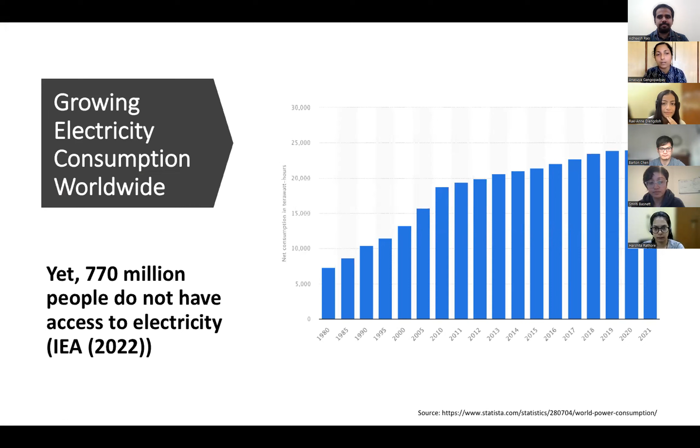Nowadays electricity has become an integral part of our life, and its consumption is growing worldwide. Yet 770 million people do not have access to electricity, so consumption will grow when these people get access. We have the Sustainable Development Goals, defined by the United Nations to attain peace and prosperity for people and planet. Some SDGs are closely related to energy, the first being SDG 7, affordable and clean energy.

Other SDGs are also closely related to energy and intertwined with SDG 7. One is health, SDG 3.9, which is connected to air pollution and health. Then comes tackling climate change.

Why are we talking about the electricity sector today? Because the energy sector alone accounts for 2/3 of global carbon dioxide emissions, and over 40% of this energy-related carbon dioxide emission comes from fossil fuel burning. This is a major issue we need to address. The benefits are that you can mitigate climate change, reach net zero, and attain the sustainable development goals.

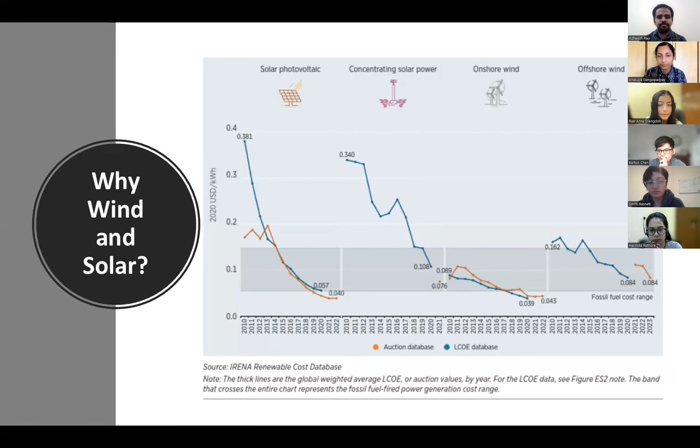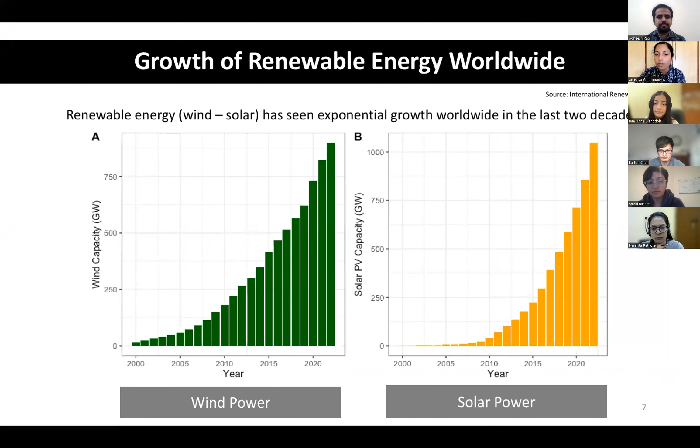This is an IRENA report on the cost reduction of these different sources. As you see, there is an exponential decrease in the price of both solar and wind in the last decade, starting from 2010. This has enabled growth of wind and solar worldwide, and both have seen exponential increase in their capacity from 2000 to 2020. The green shows wind and the yellow shows solar PV capacity worldwide, how they have grown.

India is also not behind. India has its goal of net zero emission by 2070. Now we all talk about net zero. What is net zero? To go to net zero means that you have to reduce greenhouse gas emissions to such an extent that whatever ongoing emissions are there can be balanced by removal. How does this removal happen? Mainly by sea, ocean, and the forest. That means we necessarily have to reduce carbon dioxide emission to a very large extent.

There are several points which can help us reduce that. The first and foremost one, which comes as an NDC, Nationally Determined Contribution of India, is 500 gigawatt of renewables by 2030. That means wind and solar are going to grow heavily in India. Where do we stand right now? Here we can see the status of India. India has also seen exponential growth similar to the world in both wind and solar, and we are the 4th largest in wind installation and 4th largest in solar installation today.

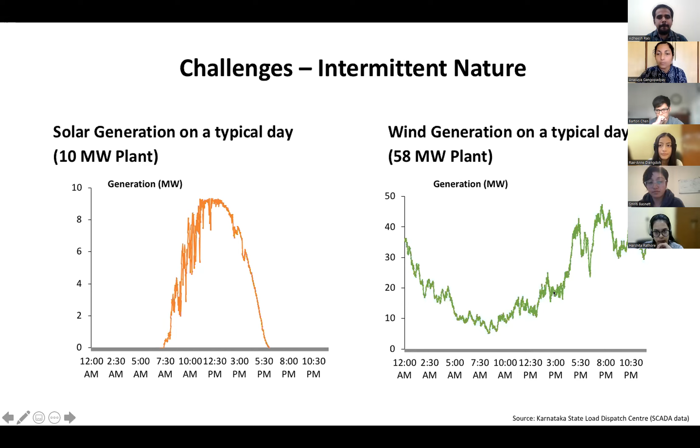Coming to day-to-day variations, here you can see two plots from a typical day in a solar plant and in a wind plant in Karnataka. These are minute-wise variations, the small variations. This is minute-wise data, so you can see how variable it is on a minute-wise basis. And then, of course, you have these daily cycles. This shows the real variability here. Moving on to the next challenge.

The next challenge is low probability, high impact events. What are they? These are events which are very rare to occur, but when they occur, they have very high impact on the entire renewable rich grid. We'll discuss more on this later. And then we have the accuracy problems of solar prediction and wind prediction. These three things mainly make renewables not dispatchable, very unlike conventional generation where you have control over the generation in coal, hydro and all these places.

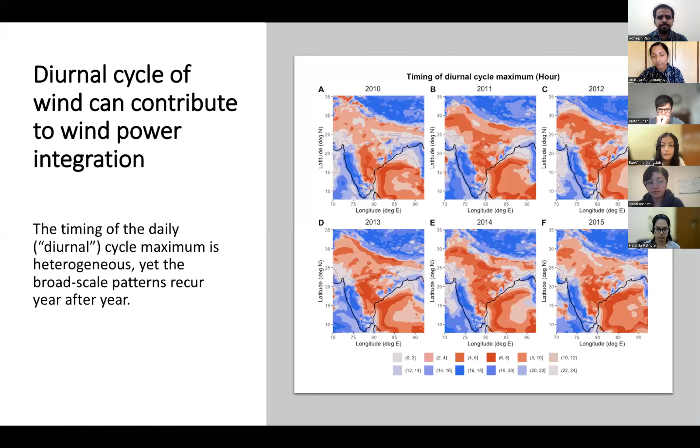And we have checked year-on-year data. It remains the same. So that's why we can explore this to plan our new wind plants in such a way that one of them is in the red area and the other one is in the blue area. And when you integrate these two, you get benefit. So this is the first part of the work.

This brings us to the second part where we talk about energy drought. So we have all seen and known what is drought. That means there is no rain. But what is energy drought? When there is no generation from renewables, because these are also weather-dependent sources, right?

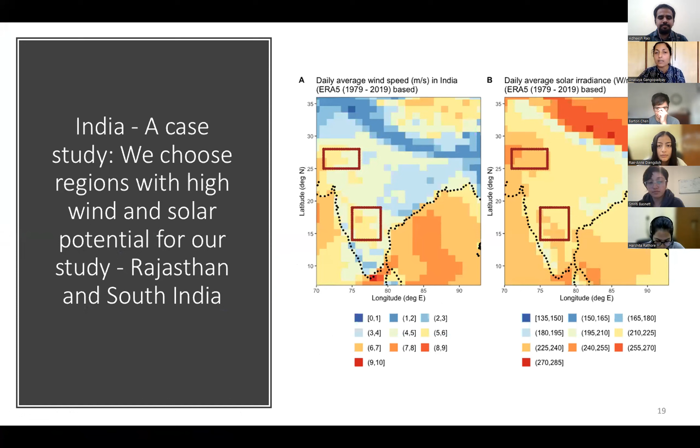So for this, we chose two regions. The first work was based on national scale. This one is based on regional scale, where we focus on Rajasthan and South India, these two boxes here, where the wind as well as solar potential is very high in India.

We found another opportunity also where you can hybridize wind and solar in southern India, and you can avoid these droughts to a large extent, because wind droughts are more severe compared to solar, and when you combine these two, you get a good benefit.

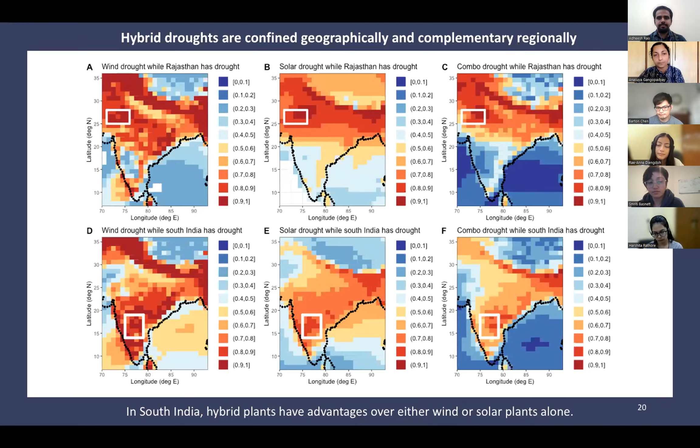This brings us to the last part of the work, where we worked on storage and a combined system which has wind, solar, and storage, and tried to look at the trade-offs. Trade-offs between what? Between the cost and the reliability of the system in a decarbonized grid, where slowly the base load provided by coal is going to reduce, and you have a certain amount of flexibility in it.

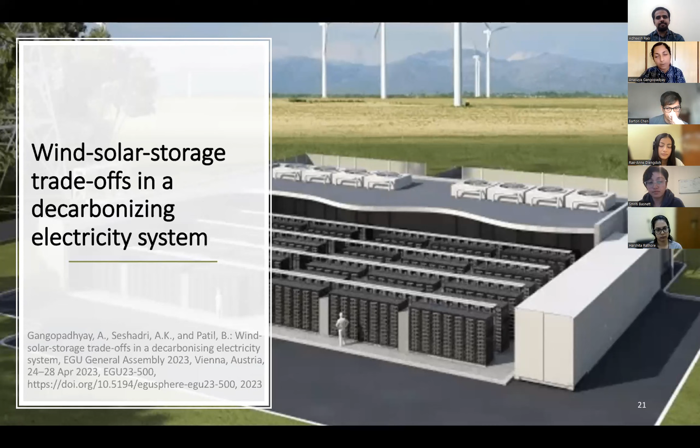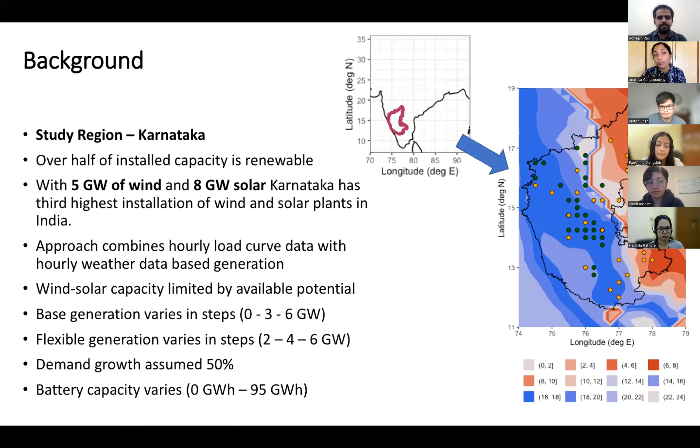The study region here is a state, Karnataka, where we are located. Why Karnataka? Because Karnataka has the third highest installation of wind and solar in India, and it's huge. We keep varying the base generation and flexibility availability, then we project the hourly demand and the hourly weather-based generation, and try to develop a model to balance these two. How do we balance?

This is a sample for 4 different seasons: one with high solar, one with high wind, and the other 2 with low wind and low solar. These are typical 6 consecutive days in each. The point to notice is this gray region, the time when we can't meet the demand using all our generation, in spite of having wind, solar, and storage, all 3.

If a battery is there, this pink shows the battery charging. However, in low solar months, you don't have enough electricity to charge your battery so much, so you end up having certain reliability issues. Coming to high wind, you can meet all the demand during the last 3-4 days, but you end up having a lot of curtailment.

So these are the main challenges here where we have to look at this problem in further detail. And we did simulate a lot of situations like this. And finally, we found out in a completely decarbonized grid with 6 gigawatts of flexible generation, and if we allow a certain amount of curtailment of generation from renewables, curtailment means when the renewable can generate, but you are forcibly stopping it. So that kind of situation is not good from a financial perspective.

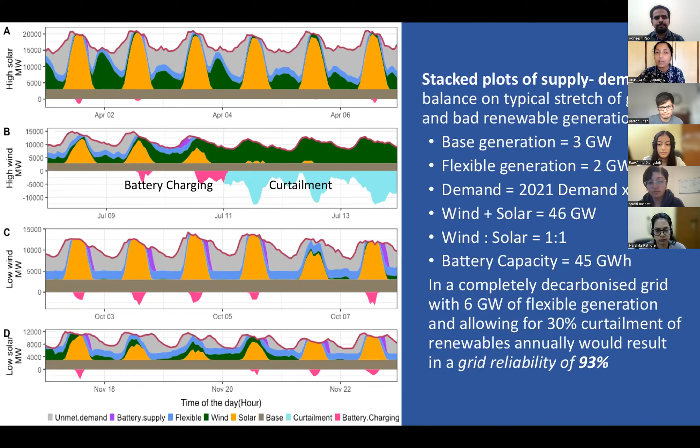But for reliability, if you can allow a certain amount of that event, then finally you will achieve 93% reliability. 100% reliability is very, very difficult to achieve, at least from Karnataka's perspective. Here are the acknowledgements, and here I summarize what I discussed earlier.

The first work was on diurnal smoothing, which says that you have to aggregate generation and strategically install new wind plants so that you get this benefit of diurnal smoothing based on the pattern. The second one is about selective hybridization to avoid extreme low generation events. And the third one was about wind-solar storage trade-offs in a decarbonizing electricity system.

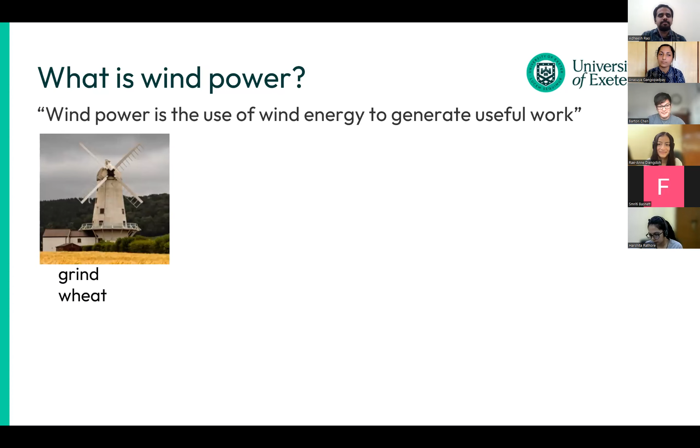So the very traditional one is you can use the windmills. In some countries, they use wind power to pump water, or even sailing boats use wind power. So there are many examples of using wind power. But today, the most popular usage is to generate electricity because that is very easy to access compared to fossil fuel. And also, one big wind turbine can produce a lot of energy for thousands of houses. So that is the way people are using wind power.

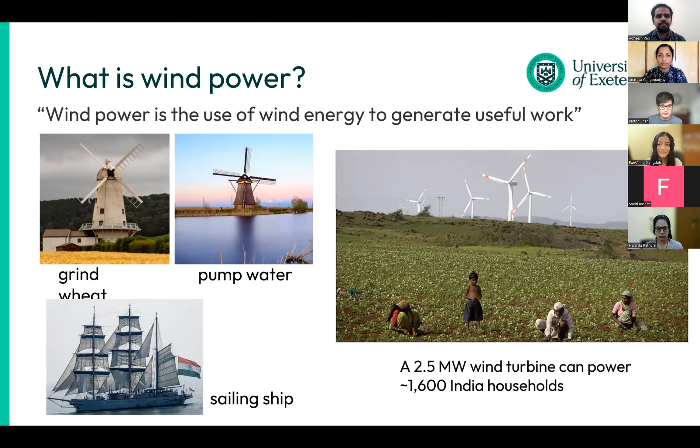So why are we using wind power? There are different things: it's renewable, ideally it never runs out, and it's easy to get because wind is pretty much everywhere in the world. And one of the key things people really like is you don't emit any greenhouse emissions during operation time.

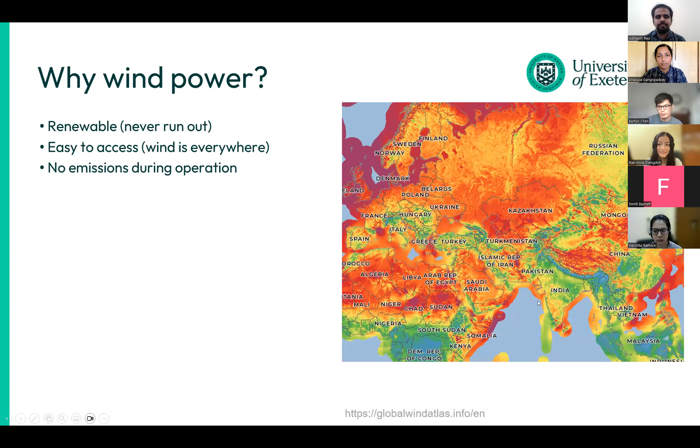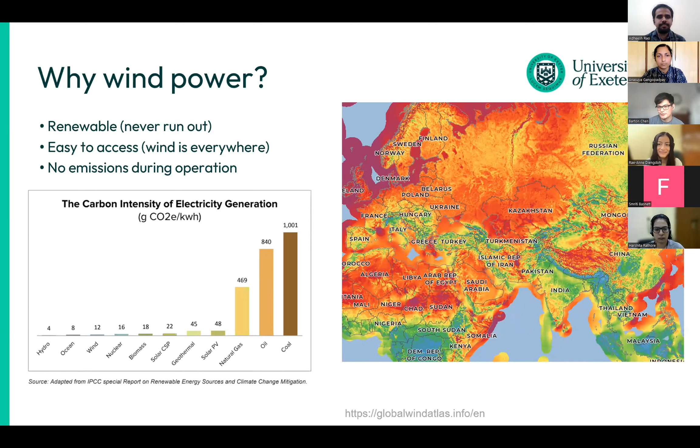And another key thing people really care about is the carbon intensity of the electricity you generate. So this figure is, when you generate 1 kilowatt hour of electricity, how much carbon dioxide emission you would produce in terms of the whole lifetime assessment. So you can see coal or natural gas or oil, they have pretty high, over 400 or 1,000. But for renewable energy like wind and solar, they're pretty low. Here, the figure is below 50. So that is one main reason people really push renewable energy, especially wind, in the energy system.

So how do we extract wind power? Based on the very basic science, wind power you can think about as kinetic energy. So you can use a very simple equation to calculate how much energy can be carried by the wind. The most basic parameter is the density of the fluid, here the air, but ideally you can apply it to water if you're talking about the flow in the sea or in the river. The second key parameter is the swept area that your wind turbine or any turbine can cover. And the last one is the speed of the fluid. So those three are the key parameters that decide how much wind power you can get.

But because the wind turbine has a certain efficiency, there's one key parameter we call the power coefficient. That is actually how much wind power you can convert to electricity. This is a little bit interesting parameter because it depends on many factors. First is the design of your turbine, and the last parameter is the turbine tip speed ratio, that is the ratio between the wind speed and the speed of the tip of the blade.

So you can see there are different designs of wind turbine. Like this one is the vertical one, and this multiple blade one, and this very interesting one with two curves. Those are different wind turbines people are using today. But the most common one you see today for large scale wind turbines is either the 2-blade or 3-blade wind turbine, because it's easier to manufacture at large scale and generates more power. But one interesting thing you can see here is this power coefficient has a limit. The maximum of this coefficient is nearly 0.6.

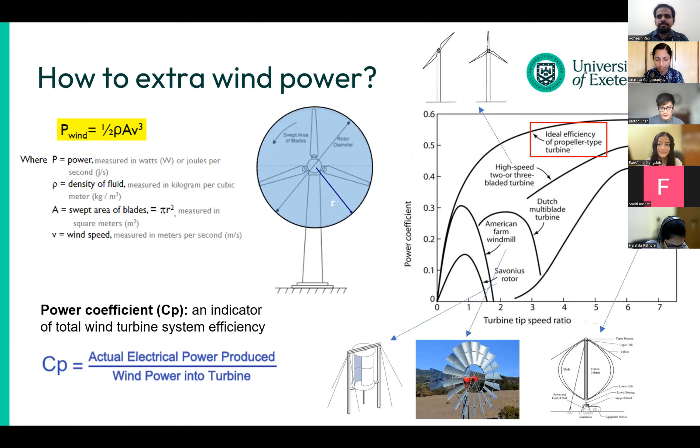Another slide I would like to introduce is the components within the wind turbine. There are a couple of basic components. First you have the rotor with the blades. The typical one is 3-blade today. And you have everything inside the big box behind, we call the nacelle. In the nacelle, the first important thing is the gearbox, which converts the low rotational speed, about 10 to 20 RPM, to thousands of RPM for the generator. Then the generator generates electricity, and the electricity goes through the power cable in the tower.

And there are another two interesting systems. First, there's a control system on the turbine that can monitor the wind direction and the wind speed. And then there is a yaw system to change the angle to face the wind. For example, if the wind is blowing from the east or north, they will change the angle. Otherwise, you will have less power generation.

Another important thing for the wind turbine is what we call the power curve. On the right-hand side, you can see in the power curve of the wind turbine, usually there are 3 important wind speeds. The first one is the cut-in speed. It means if the wind speed is below that number, you can't generate any electricity because it's too low. Once you pass that wind speed, the power generation starts increasing. Once you reach the rated output speed, you produce the maximum electrical power.

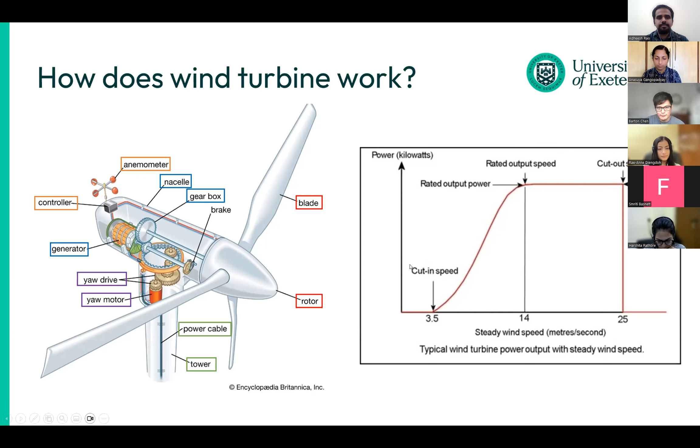And so one tricky thing is how we can keep the same electricity power output. There's a pitch system that can change the angle of the blade, so that can keep the load on the wind turbine the same. So that's a little bit about how the wind turbine works. So I want to introduce this.

There are two typical types of wind power we can see today. One is onshore wind power generation, the other is offshore wind power. And one of the key reasons is the wind power is really affected by the terrain on the ground. So for example, if you are in a city or in a forest, even a few trees will make the wind speed reduce close to the ground level.

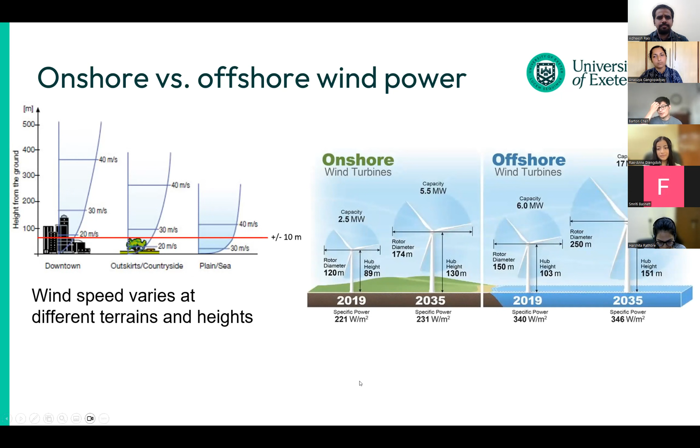So that's why more and more wind turbines are built on the sea, because there are no buildings or other things to slow down the wind. And another thing is when the turbine is higher, the wind speed will be higher. So that's why nowadays turbines are getting bigger and bigger and higher and higher. The typical 2.5 megawatt turbine is about 100 meters high, and in the future it will probably increase to 140 meters high.

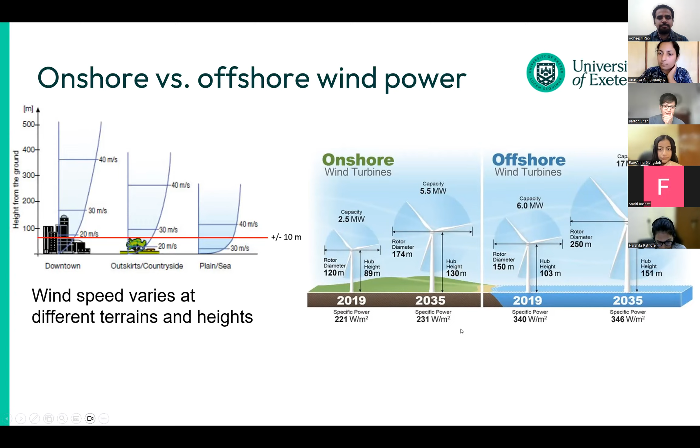But for offshore wind, it can be nearly 150 meters today, and people are even talking about 200 meters. So that is the progress of wind power technology. But besides onshore and size, one of the things people have to think about is how to build those wind farms. One of the biggest limitations for onshore wind turbines is they are pretty big, and the parts need to be transported by road.

But for offshore wind power, it's slightly different, because ideally, if you have a way to access the port on the sea, then you always have more space to build a very, very big thing. So that's why today a lot of offshore wind turbines are much, much bigger than onshore, because it's easier to handle big things. But the challenge is how to install them.

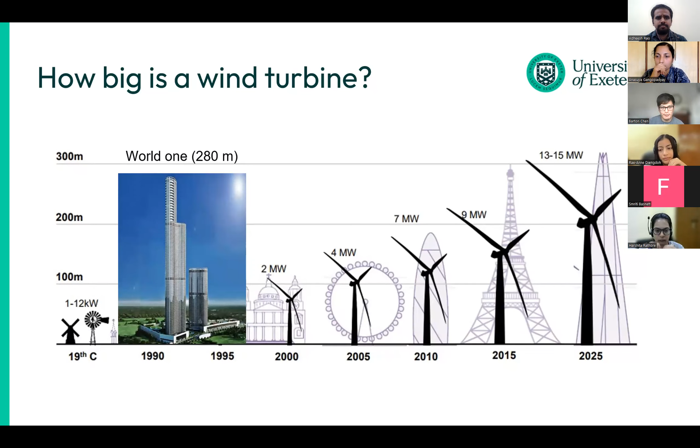Just for reference, this one building in India called World One is nearly 300 meters high. So in the future, some offshore wind turbines could be much bigger than that. That will cause a lot of challenges, like how to get those materials, because they're really big, and how to do installation and how to maintain them. So there will be many technical and engineering challenges.

So now, since the wind turbine is so big, what is the material to make those things? Basically, there are about five different materials. The first one, the body of the tower and the cover of the nacelle, is usually made of steel or iron, because that gives a stronger structure so the turbine can stand in strong wind. And in the generator and the transformer, you have a lot of electrical materials like aluminum and copper, for electrical transmission.

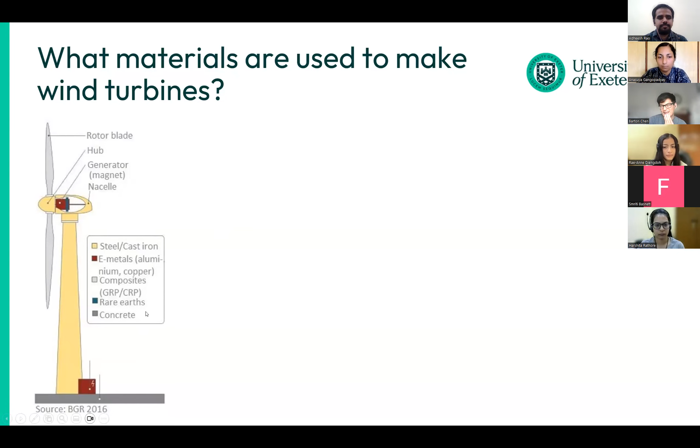And the third one is a very tricky one, the blade, because the blade is very long and needs to be very thin and light. So today the most popular materials they use are composites, different kinds of polymer. And the last two are the rare earth materials for the magnets in the generator, and there's some concrete at the bottom. So that causes some problems.

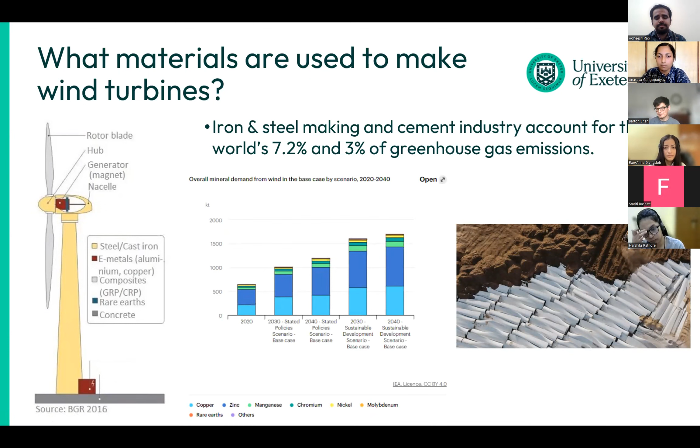And the last thing is another very tricky challenge: the composite blade is very difficult to recycle. So today, what people do once they decommission the blade is just bury it under the ground. That is totally not sustainable.

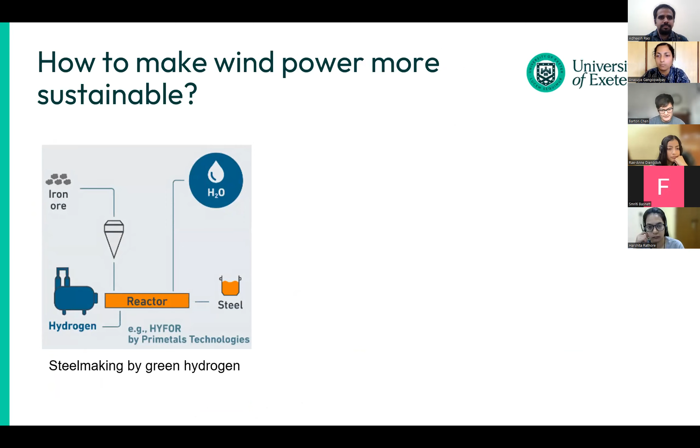So if we want to use wind turbines to decarbonize our energy system and make it more sustainable, how can we do it? There are different technologies. For example, they already have steel making processes powered by green hydrogen. So instead of using coal, they use hydrogen in the reactor. So that is one of the innovations people are working on now.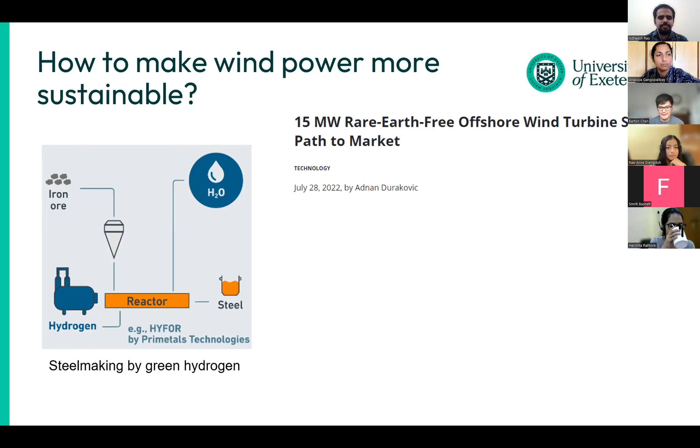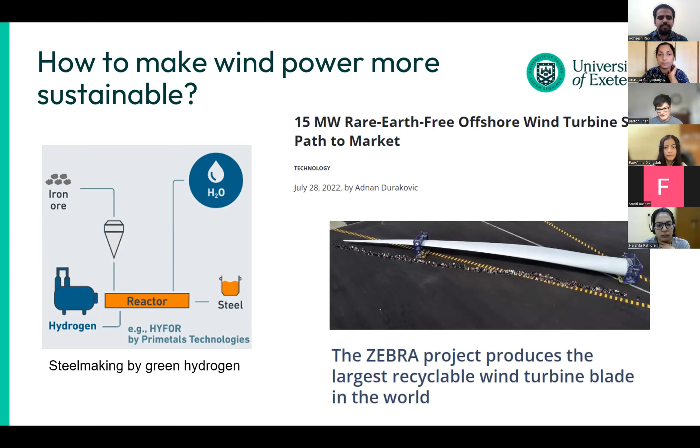And another one is the rare earth material free wind turbine, which means they have an innovative generation system in the turbine. That can be another option. And the last one is people are working on recyclable wind turbine blade material. So that can reduce the environmental impact of wind power.

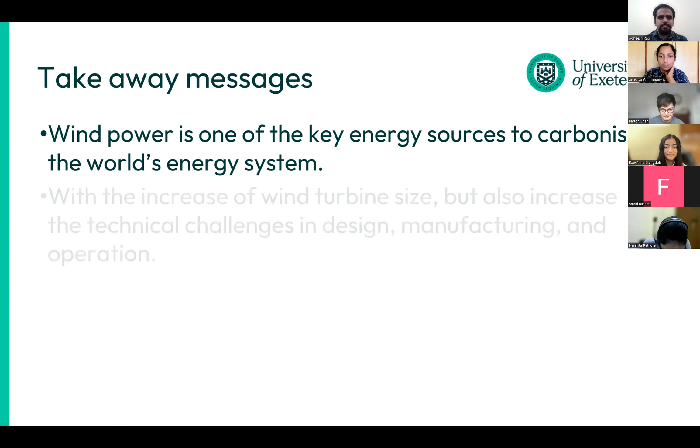So here's my last slide. Today I talked about many things, but the key thing I want you to know is, first, wind power will be one of the key energy sources in the future. So you will probably see more and more in the next 10, 20, 30 years. But as you can see, the size of turbines is increasing, so there will be many technical challenges.

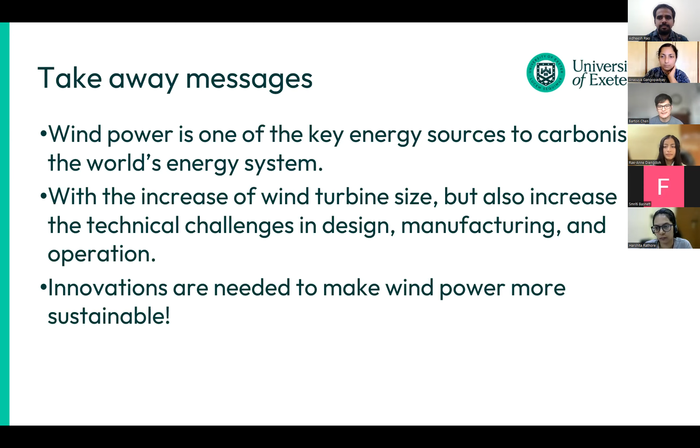Like how you design something that big, how you manufacture those big things, and how you maintain and operate them. Those will need a lot of engineers and scientists to solve. And another one is that innovation is really important, because we are using wind turbines now, but a lot of things still need to be improved, especially to make the life cycle of the turbine sustainable. So that is my talk today. Thank you.

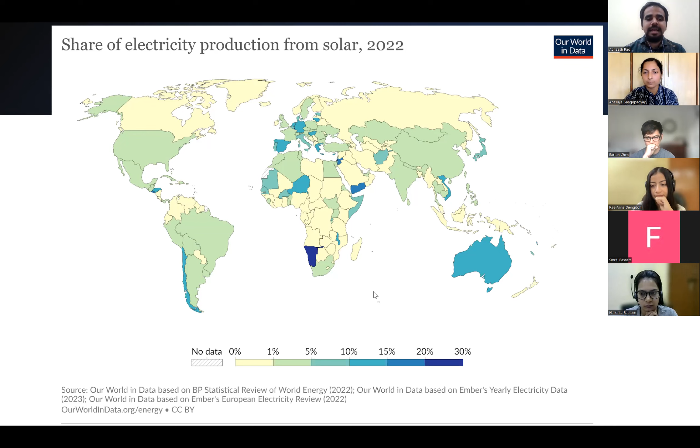And in India, we have just 5%. And across Asia, it's almost the same. And it's the same across the Americas as well. But there are certain countries which do make much more use of solar energy because they don't have other energy sources like solar, which is easy to use.

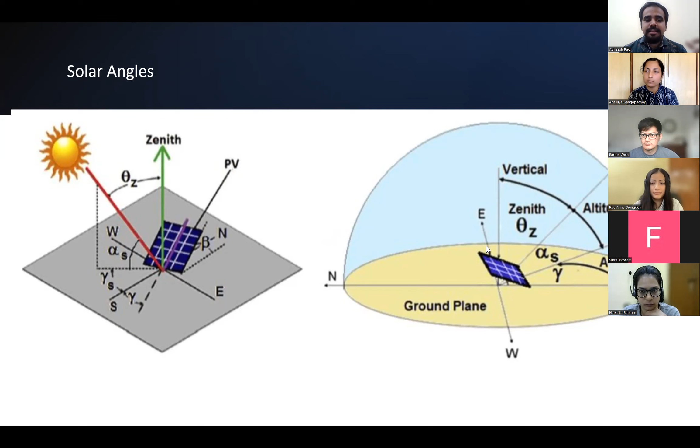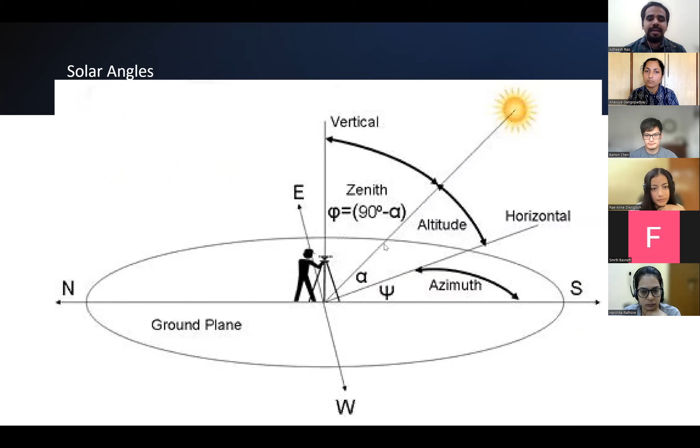Next, we shall cover the various types of angles. Why is it important to know this? If you are asked how much energy from the sun is falling on top of a solar panel and how much of it is used, these are the angles that we need to consider. So for example, we have the zenith angle, which is 90 minus alpha, the azimuth, which can be seen through the horizontal distance from the south or any other axis. These angles are what help us determine how much energy is generated through solar.

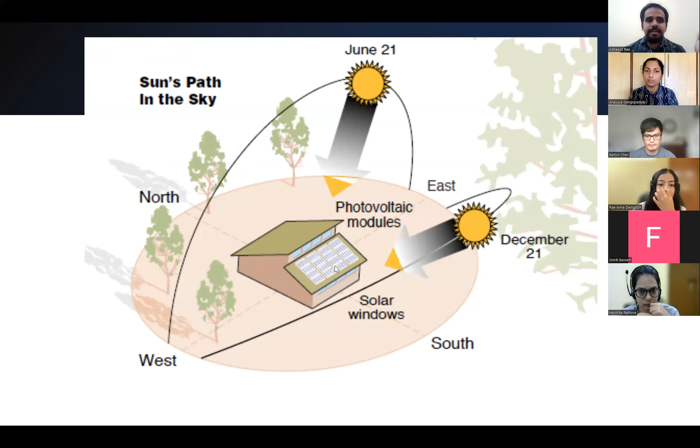So here you can see the solar panels on top of a house, and the movement of the sun from the east to the west, and the pattern of how the sun covers its daily cycle of moving from the east to the west. This is the sun path. And next, I shall come to the actual operation of the solar cell.

So before that, let me tell you that a metal does not have different layers. Even though it has layers, the layers are very close to each other. And that is the reason why the electrons are able to move very freely, and there is no energy gap in between, in the sense that when the metal is excited through any medium, the electrons are able to move very freely, and that is why they conduct electricity much more easily.

Whereas insulators have a band gap. So what happens is that even if you put electricity into it, because there is a difference in the surfaces within the material, the energy is not conducted, in the sense that there is a band gap of over 3 electron volts in between. So even if you apply some energy, the band gap is not crossed, and the electrons are not able to move. That's why they become an insulator.

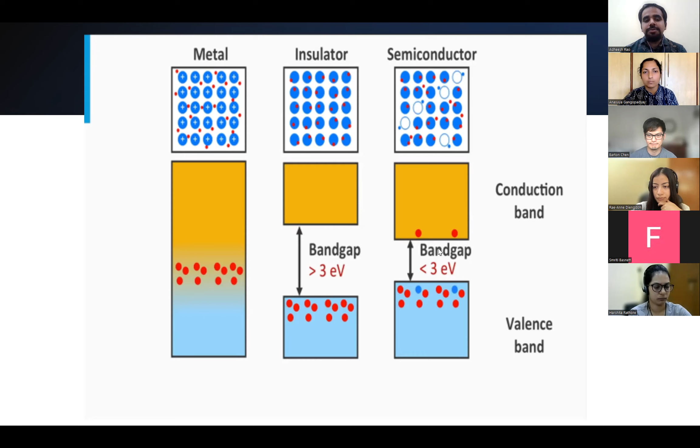And the semiconductor is basically a material which has a shorter band gap, and the electrons are able to jump across the band gap, go to the conduction band and conduct electricity. And that's why semiconductors are used for solar cells.

So now let me get to the chemistry aspect of it. So here we have a hydrogen atom, and you can see at the center of the atom you have the proton, and in its orbit you have an electron. So there are different levels of orbits around an atom, and these orbits determine how far away the electron is from the center.

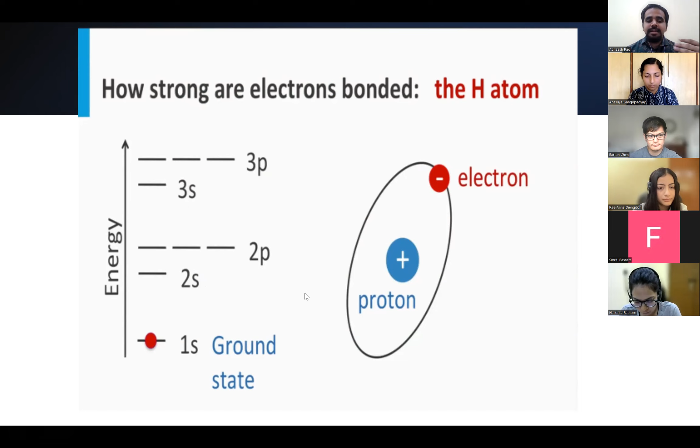So we have 1s, 2s, 2p, 3s, 3p. They are the different orbit levels around the center of the atom that the electrons occupy. Here, the hydrogen atom has only 1 electron, so it's in the lowest state, which is the closest to the atom center. So that's why it is quite stable, and it does not react with other elements. Whereas we have helium, which has the first orbital occupied with 2 electrons. So 1s, which is the closest orbit, has 2 electrons.

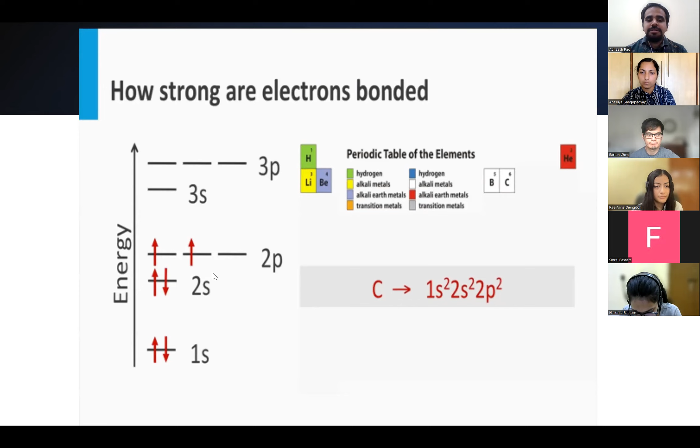And next we have carbon, which has 6 electrons. And the distribution is such that it goes to 2s and 2p. So they are orbit layers around the atom. So as you can see, at 2p you have 2 electrons which are further away, and they can react with other elements. So that's why carbon can basically fuse with other elements, because of the electrons at the outermost orbit, which is 4 electrons. So these 4 electrons in 2s and 2p can react with other elements.

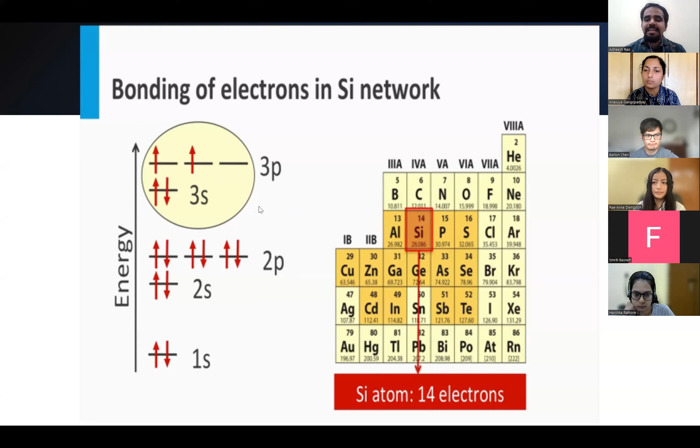Next, I'll be talking about silicon. Silicon, which is used as a semiconductor, has 14 electrons. And out of these, the 4 at 3s and 3p, which can be seen in the diagram, are able to react with other elements. They basically need at least 8 electrons to become stable, so that they don't react to the outside world. And since silicon does not have a stable configuration, it has 4 electrons that can react with other elements. And that is why silicon is chosen as a semiconductor to generate electricity, because it is able to give away electrons very easily, and it can react with other elements.

And you can see that the periodic table basically tells you how many electrons are present in the outermost orbit. So the placement of each element explains how many electrons are present in the outermost orbit of the atom. So basically carbon has 4 electrons, silicon has 4, and germanium has 4. So they become group 4 semiconductors. And since they have 4 electrons, they can combine with another element which has 4 electrons. And that is why you can see the light blue here is how they react with each other. So silicon and germanium react together.

Whereas 3-5 semiconductors, that means 3 in one and 5 in another, combine together in the outermost orbit and become a proper semiconductor. And then you have 2-6. So 2 and 6 together becomes 8. So you have cadmium telluride, which is shown here. So it forms a stable configuration when it reacts with other metals. You can see the green which has 2 and the green which has 6. These elements have been marked in 2 different ways to show you how they combine together.

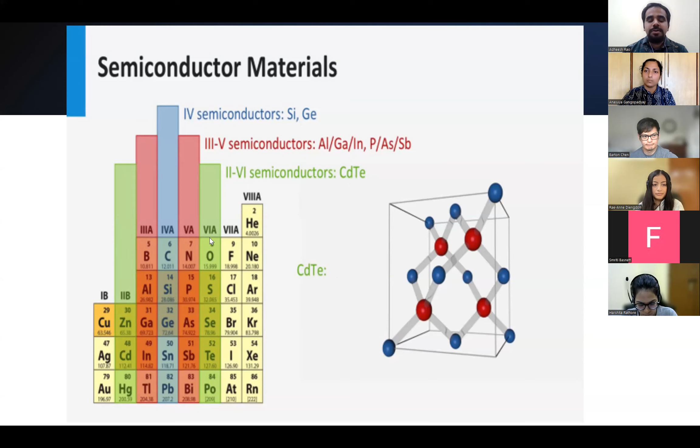So then we have what is a p-type semiconductor and an n-type semiconductor. So silicon is doped, in the sense they put an element on top of silicon. Some, like phosphorus, give you extra electrons; that is called the n-doped element. And some are called p-doped. P-doping is when they put an element on top of the existing element, which creates holes, in the sense that they lack electrons. Even though they are fused with silicon, they will still lack electrons. And because of that, they become p-doped and n-doped semiconductors.

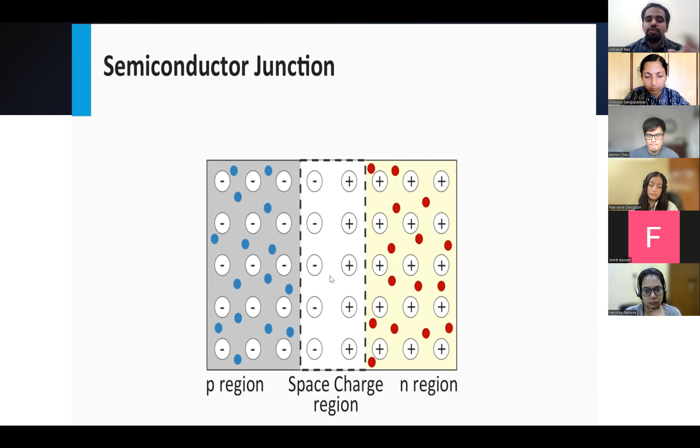So you need to make the electrons cross over so that the electricity is generated. In the p-type and the n-type, they have different energy Fermi levels, and because of which you need to provide some energy for them to get excited enough to be able to cross the band gap.

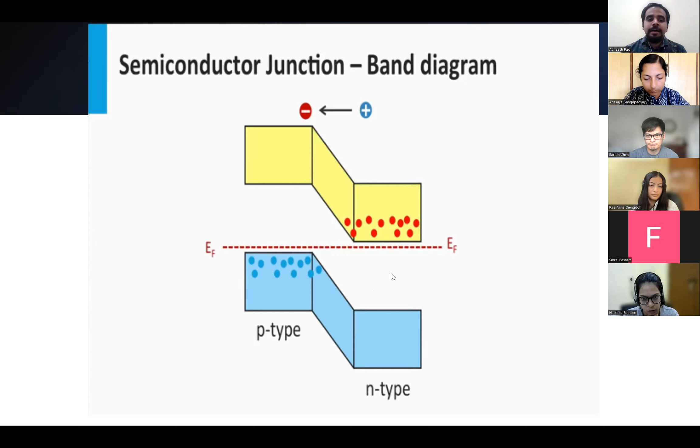So in the p-n junction of solar cells, there are 3 essential steps that are required for the operation of the cell. One is the electron hole pair generation, then the separation of the electron and hole at the junction, where the wires are connected to the semiconductor, and then the collection of electrons and holes at the terminus, wherein the electrons start moving towards the holes.

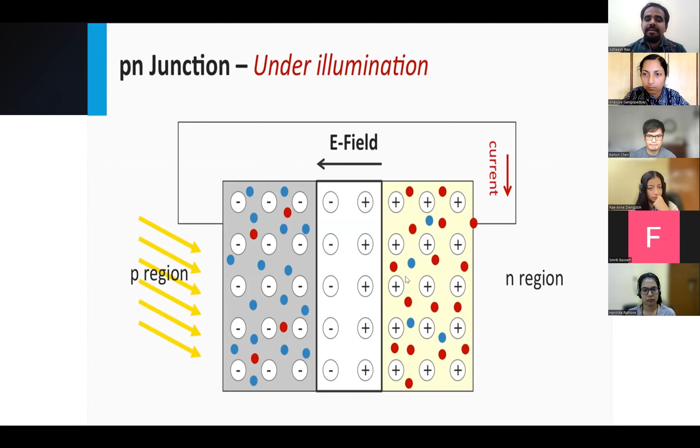So here, as you can see, the light falls on top of the semiconductor. It charges the semiconductor, which makes the electrons get excited enough to go to the next state. And that in turn gives you a current.

And here you can see in a better way how the N-type has the electrons that move to the P-type, and the P-type has holes that move towards the N-type when they are connected together. And they cross over the depletion region because of the electric field generated. And the depletion region is the gap at the junction, wherein they have the positive and the negative charges. And because of which you have electricity generation.

That is, the light falls on top of the semiconductor, the electron gets excited, and they move towards each other through the depletion region, and they give you electricity. And here you have another description of how they move through the solar cells. So each solar cell produces almost 0.5 volts, and a series of solar cells are connected together, and they together give you energy of 150 watts or greater.

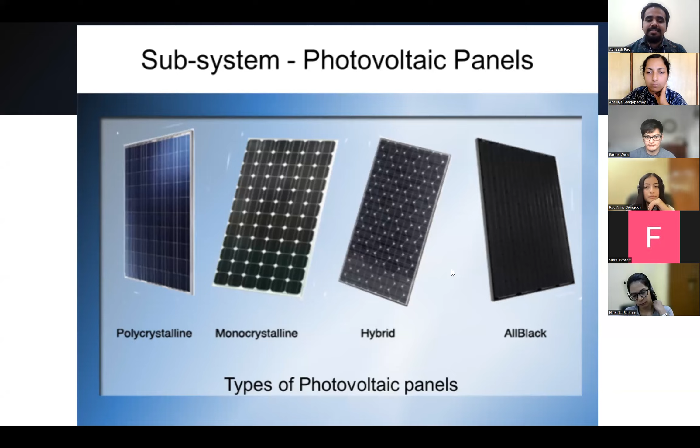And these are the different types of photovoltaic panels that you can see. They are monocrystalline, polycrystalline, hybrid, all black. There are different types of solar cells which generate electricity. And there are certain applications for solar cells as well, which might not be known to people.

For example, in the university where I studied my master's, the university is working on making solar powered cars. With the help of the university, they have already launched a car called the Lightyear 1. You can search for it, Lightyear 1.

And it has a range of almost 720 kilometers. It can give you 400 kilometers if you charge it one night. And it's a very nice car, and you should check it out. It's similar to Tesla, but it is powered by solar cells.

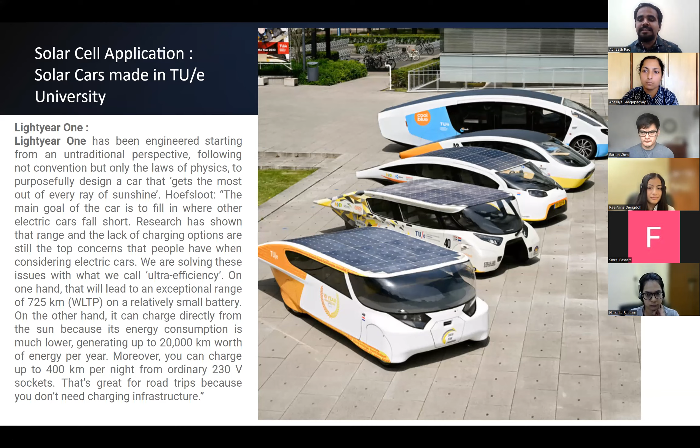And the other major application of solar is definitely the building sector, wherein you have panels integrated on top of the buildings, like the rooftop type, the balcony type, or curtain wall type. So basically, they integrate it into the building so that they help you generate electricity for household needs instead of relying on the grid.

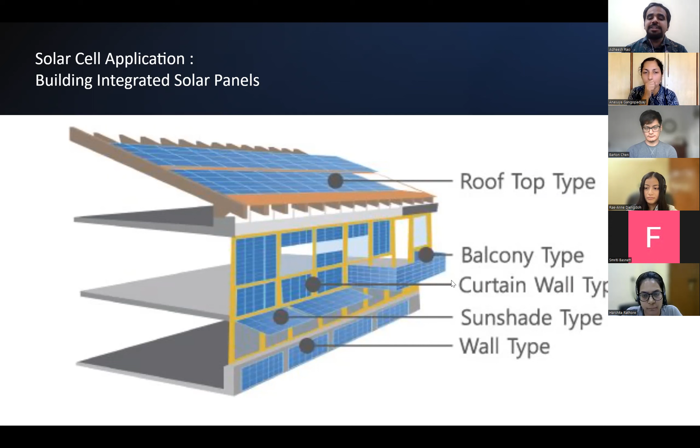And there are many different components of a solar cell system when it is connected to a home or a building. So basically, when you have kept it outside, you have a charge controller, a battery, and then you have an inverter. And after which you get the electrical appliances, which basically use the electricity. So what are these different components? I'll be explaining in a bit more detail.

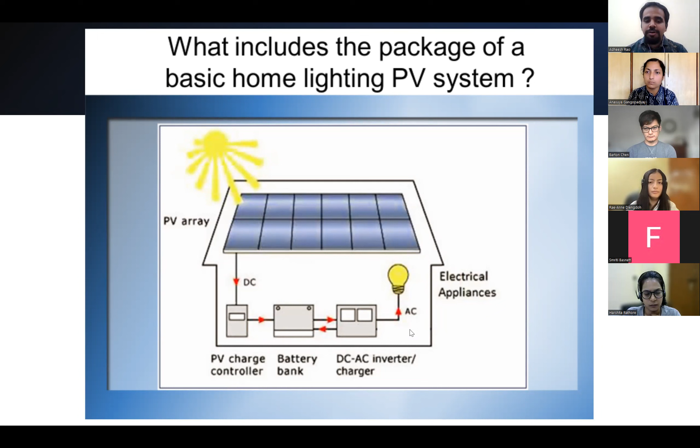And then there is dust collection over the panels when they are not maintained. Then even if there is just a tree next to the solar panel, it might not charge as well.

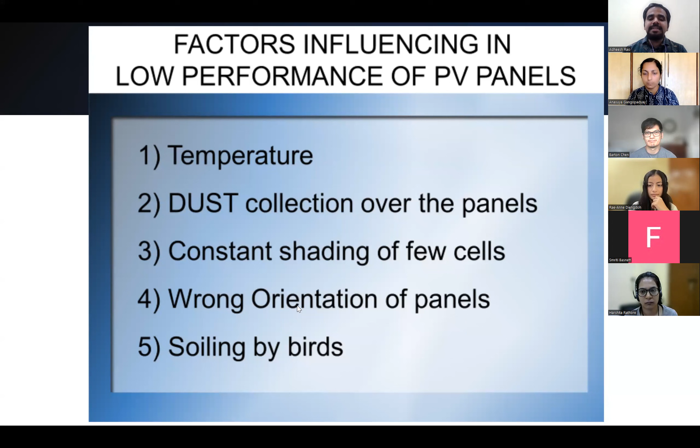And then there is also the problem of having to orient the solar cell towards a particular direction so that it gets direct sunlight. And then also, of course, there's soiling by birds. And next, I'll come to the different components of this system which we are having at home.

So we have to choose a battery. And to choose a battery, we have to look at the amps and the volts, which gives us the watts. And you'll need to know how much energy or loads are operating over the system to choose a battery. So how much energy is going to get generated from the solar cell has to be known before we get a battery for it.

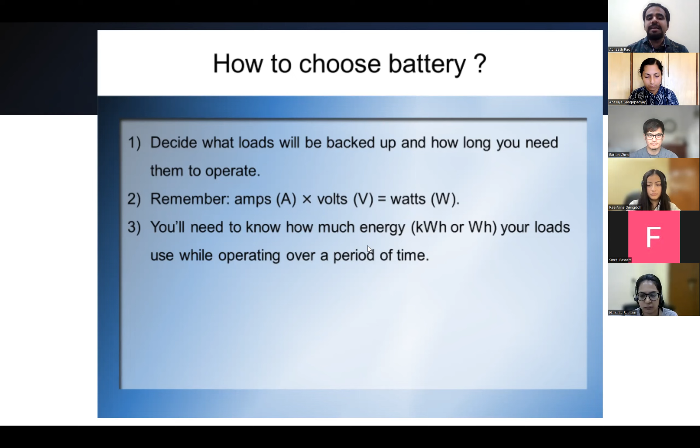And the battery has something known as a depth of discharge, in the sense that you can have 1,500 cycles of energy discharge at 80% depth of discharge. The battery can give you energy up to 80% when there's 1,500 cycles of it which has been used. And there are 3,000 cycles at 50% depth of discharge and 5,000 cycles at 20% depth of discharge. In a sense, the amount of energy reduces, but it can operate longer.

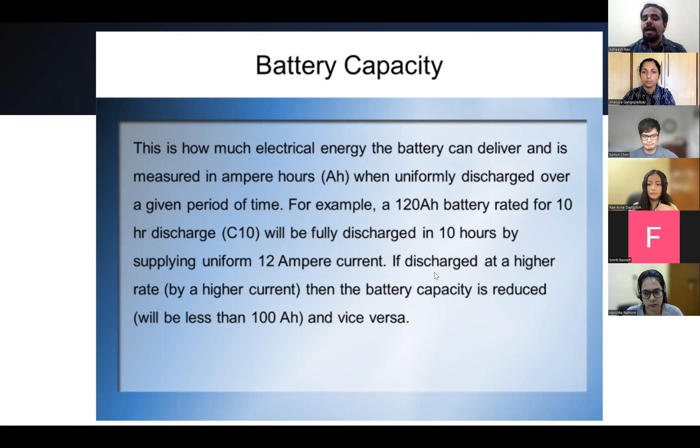And for example, a 120 ampere hour battery rated for 10-hour discharge, C10, will be fully discharged in 10 hours. And it will supply a uniform 12 ampere current. If discharged at a higher rate, then the battery capacity is reduced and it will be less than 100 ampere hour. Okay, so 12 ampere current you get for 10 hours. You can multiply it by 10. So 12 ampere each hour, and it operates for 10 hours. So that becomes a 120 ampere hour battery.

And then we have an inverter. These inverters are basically what help convert the electricity generated at the solar cell into the electricity that can be used at home, which is the alternating current. Because what we get from the solar cell is direct current. So it has to be converted into alternating current, which can be used at home. So that is why we need an inverter, even if we get a solar panel. These are some components that are basic requirements for the operation of the solar cell.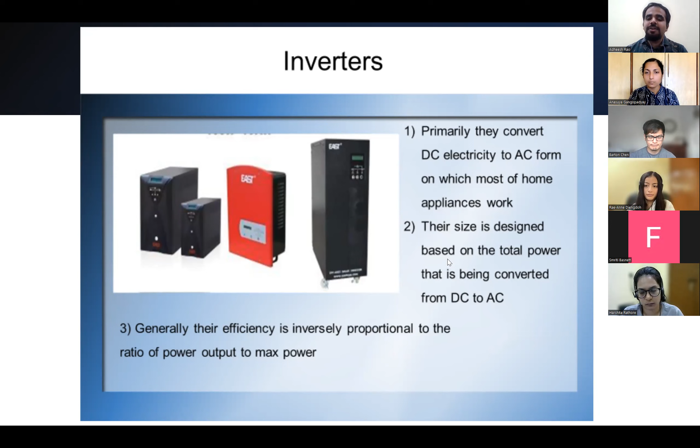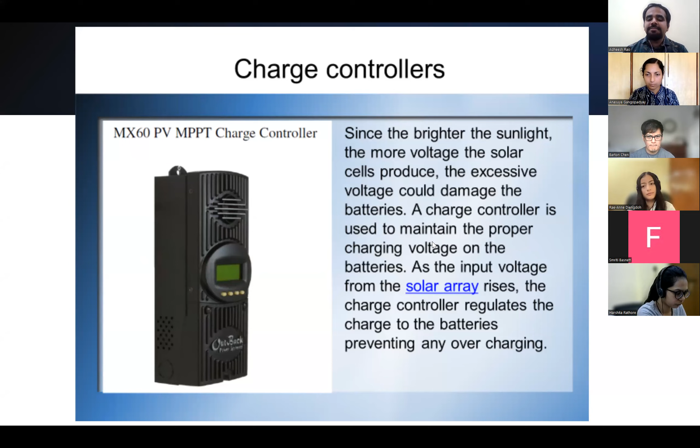And then we have a charge controller. So basically what this component does is to reduce the amount of excess voltage that can be generated from the solar cell. Sometimes you cannot determine how much energy the solar cell can give out. So these charge controllers give you a uniform input voltage to the battery so that none of the components get affected.

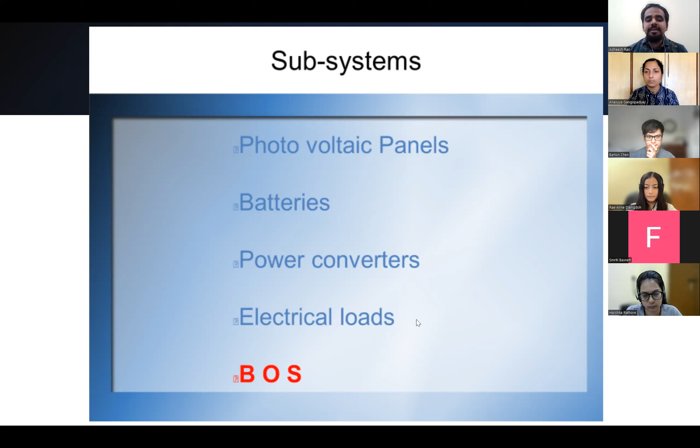And so we've covered many subsystems now. So we have the solar photovoltaic panels, then we have the batteries, then the power converters, and then the electric loads, which are like the lights, the fans, etc. And the last component is called the balance of system. So the balance of system is that you need mounting structures for the panel, in the sense they have to be kept at an incline.

And then there is labor. Then there are fuses and switches which need to be present. Then there is wiring, and then you also need an energy meter. So these are all the components that go into the working of a solar cell, especially for buildings.

I have talked about buildings because it is the most widely accepted form of solar energy. You don't see the Lightyear 1 car everywhere, but you do see solar panels on top of buildings. So I thought I would better explain the different types of components for solar power in buildings. And I think I've come to the end of my talk.

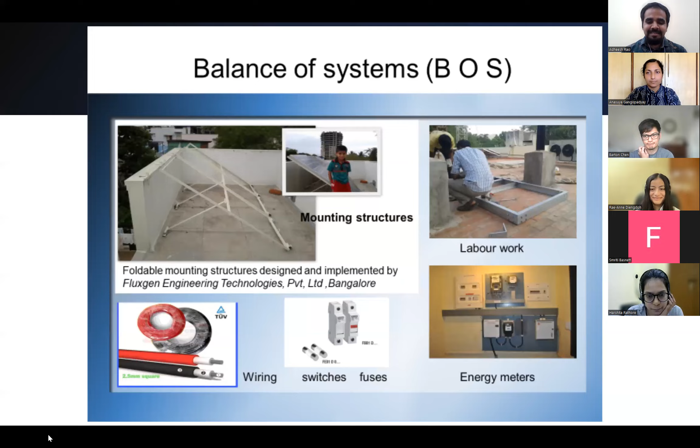I think we have one question which was on the chat box. I don't know who it's addressed to, but I think anyone who would know can answer this. It's from Rajesh, from a college called Namchi College. Let me just find it. Yeah. So his question is, we all know that methane is more polluting. Is there anything related to carbonizing methane?

I think biogas plants make use of methane. So that is the most appropriate use, biogas plants. But apart from that, I don't see other uses for methane. Maybe the other speakers.

So, I guess, well, in the UK, we use a lot of natural gas, mainly methane. So in order to replace the use of them, people have probably two alternative solutions. One is to electrify your energy system. For example, instead of burning natural gas, you use an electric cooker.

Another one is using green hydrogen to replace natural gas. That's another way, but it's a more long-term solution. So far, those are the two options I can see. Yeah.